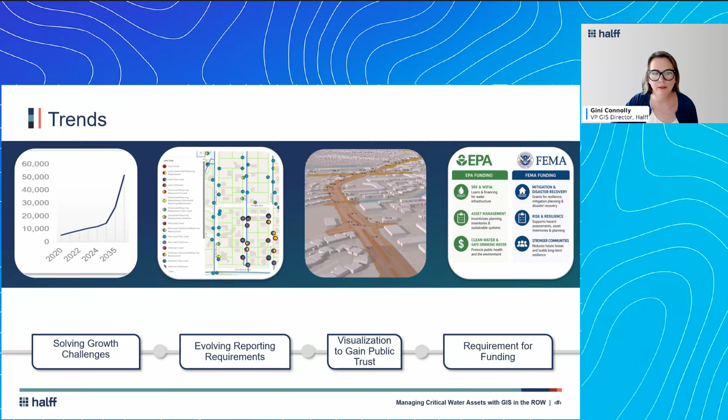And we're also seeing, I really wanted to cap it and underscore, that these asset inventories for these critical assets are a requirement for all the different funding sources that have become available in the changing funding world. So I'm going to walk you through a couple case studies of each of these to just sort of give you a taste of different projects that we're seeing and how GIS and spatial data is supporting these.

This is the town of Northlake, which is a suburb of Fort Worth, Texas, just north of the Texas Motor Speedway. We provide their engineering services as well as their GIS services for this growing town. There's a lot of area to be developed, and it is being developed right here. We call it the Golden Triangle in the Dallas-Fort Worth area.

On the left is a map from their master plan. And we're shifting the thought from these static master plans to more of the dynamic master planning. So really getting that data on a more routine, frequent basis to make these master plans more livable, rather than just a three-ring binder that sits on a shelf.

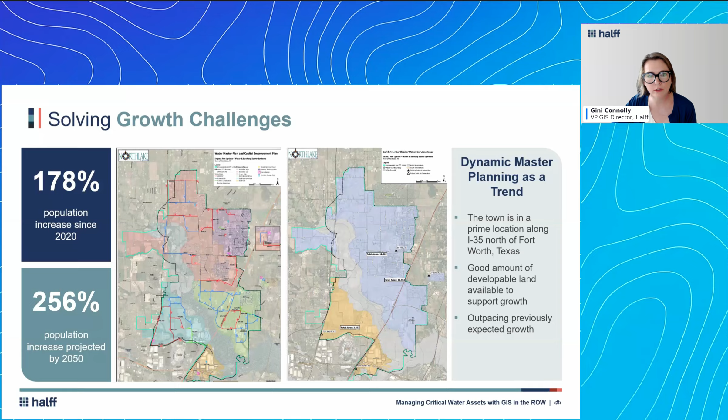So on the right, you can see the two different water sources, the wholesale suppliers that provide water to the town. The growth in the town outpaced what the comprehensive plan suggested, what the master plan suggested. So we track the development for the town, what stage the development's in, but we needed to also add, as an example, we really needed to see how many connections specifically were going to be impacting that particular pressure zone to make sure there was the capacity in that area.

So now with the development, we're tracking the connections, which has become important to understand. It's a little bit of a gap from what the work order and the permitting is showing, that we're really trying to manage those resources better.

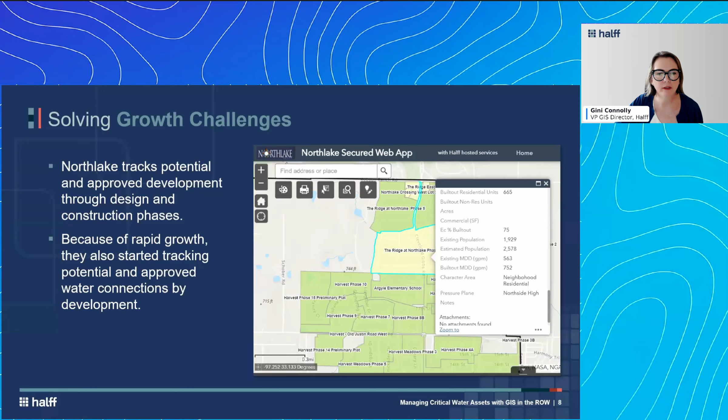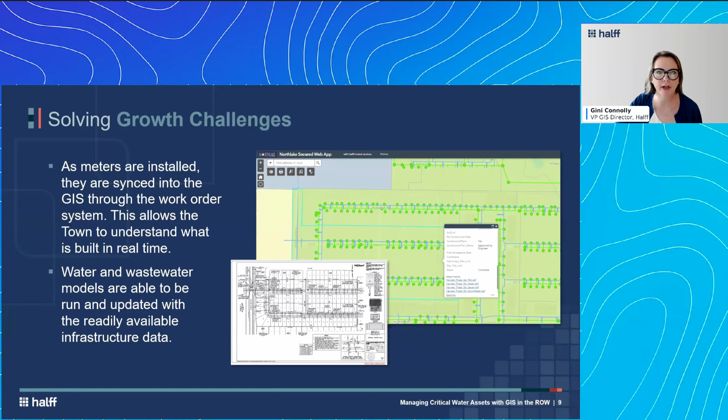As soon as the meter is installed, it's integrated with Cartegraph as well as the GIS. So the development department, the city manager's office, everybody can see when those connections come online, as well as the SCADA environment.

In this particular case study, I also wanted to show we forget that GIS really is behind all kinds of collaboration, but we're seeing, and I wanted to share, we're seeing the need for a lot, especially on the water and wastewater side and the stormwater side.

A lot of these limited natural resources, water, wastewater, as well as funding resources, we're seeing these are not localized issues that need to be solved. They're regional issues. The town of Northlake worked with the city of Fort Worth through their master planning process to create a second redundant water line, the water supply. When you have just one water supply, it's a bit of a threat, and it doesn't necessarily have the capacity.

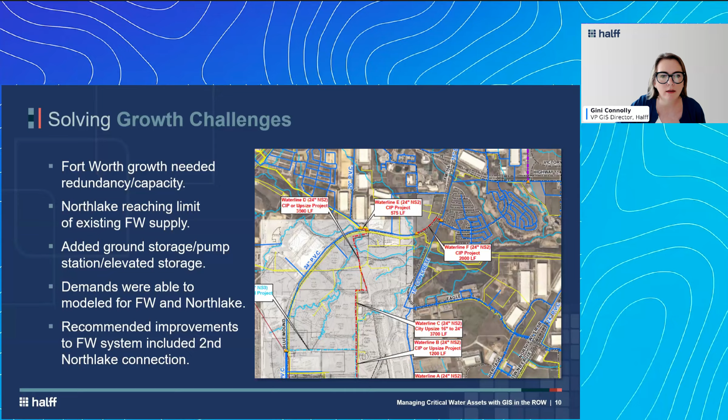So a lot of these challenges are being resolved between cities, counties, and districts with this GIS data. It's able to be modeled quicker, updated quicker, understanding what the adjacent infrastructure is necessary to ensure the supply for that particular area.

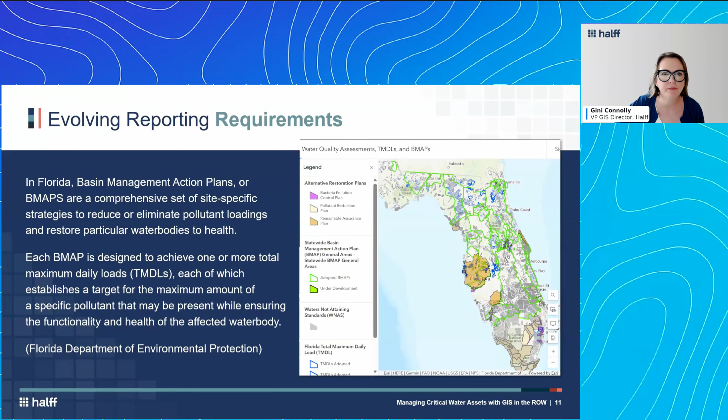On the reporting requirements, we've talked a lot through the years about lead service line and MS4 reporting, and I'll show a bit about that. This is the state of Florida. They are really progressive on water quality reporting, and they control the water quality by different types of basins. There are basin management action plans for those basins within Florida, called BMAPs. Each BMAP is unique to the particular areas and challenges in that basin. We're working with the city of Tavares in Lake County, in the middle of the state, developing the BMAP for the Ocklawaha Basin.

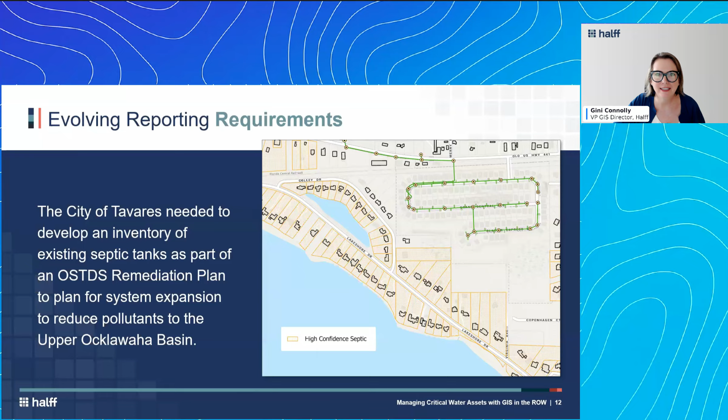They needed a plan to mitigate their existing septic tanks and bring those into the wastewater system, so they needed to know exactly where their septic tanks were. They did not have an inventory of these septic tanks or the people on them. However, they had a very robust GIS tracking all of the sanitary sewer and water services. We were able to correlate that with all of the billing data and building footprints through a big GIS desktop analysis to develop their septic tank inventory for the city.

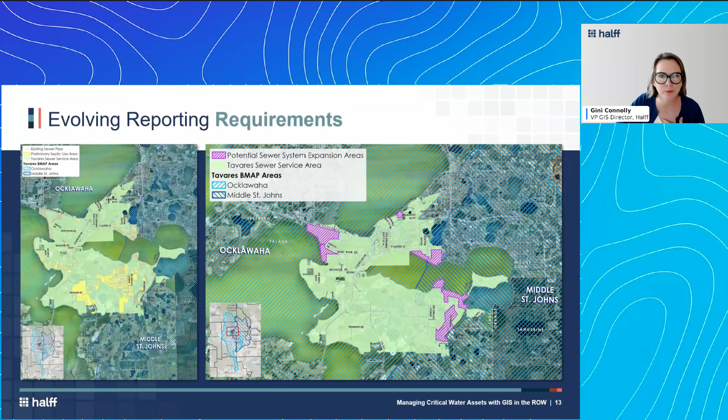On the left, in yellow, you see what needed to be brought onto the system in future years as part of their septic tank remediation plan. On the right, this shows the areas that can be phased, with cost estimates to bring those subdivisions onto the wastewater system to really improve water quality for the city. I thought that was interesting, especially if you're not living in Florida and familiar with how they report. GIS is at the center of all of it.

I wanted to throw this in because we probably have a good deal of audience that are GIS users. We are mapping the storm drain inventory, helping the city of Arlington, and we developed attribute rules to increase accuracy and make data editing more efficient. On the left is a snippet of some of these attribute rules, and this improves all of their stormwater reporting. If you're not using attribute rules to manage these utilities yet, you're missing out—definitely look into that, because it really helps editing and the quality of the data.

One thing we take for granted is visualizing data, but we have this spatial data available now to tell the story. We're in a political climate, especially since 2020, a more volatile political climate, where we need to engage the public and develop public trust as utility owners, or supporting the utility, and get stakeholders engaged as well. We need to show them what that data looks like and tell the stories. We're seeing this as a really important function of GIS that needs to be promoted and identified.

On the left, you'll see a story map funded by ARPA. This is one of my favorite story maps we've provided—it's not interactive here, but we had drone footage showing where these particular investments were planned to be. The story map can be linked off of the city's website. We're seeing this used for comprehensive plans, master plans, and all of those BMAPs. We didn't do story maps for those BMAPs, but in Florida there's a really cool story map for all of those BMAPs if you want to look. On the right is a project we're working on with the city of Fort Worth, a corridor development concept, and we're able to visualize this fairly easily now.

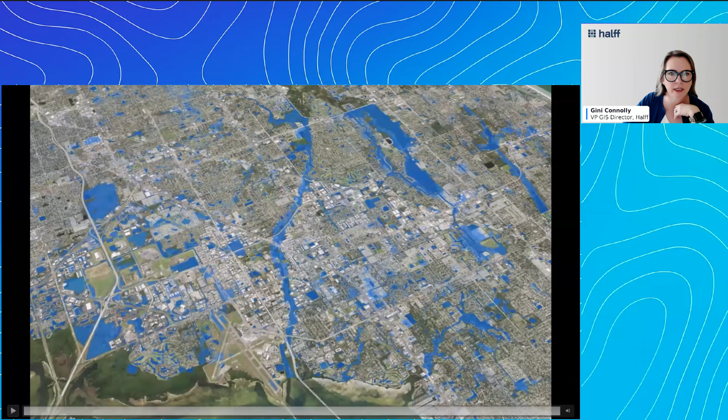And so we're seeing these 3D representations and visualizations increasingly important to tell the story of what flooding could look like in that area. And then it helps you identify what your vulnerabilities are, your critical assets, what needs to be mitigated, and create those vulnerability plans from there too, vulnerability assessments.

Lastly, I definitely wanted to talk about funding. As the funding mechanisms have changed, we've seen over the last couple of years for almost all the agencies between federal and state, it's a very dynamic environment for funding. A lot of this money is coming through federal and state agencies to help support the utilities, especially on the drinking and clean water fronts.

And it's through requiring or getting priority funding. It's a requirement of some of these funding mechanisms to have your asset inventories and your critical assets mapped and understood, and be performing asset management activities to get some of these state revolving funds, all the drinking water funds. So that's the big money that many water utilities really depend on, as well as getting the FEMA money for the risk assessment.

You need to have a hazard mitigation plan, understand where your critical assets are. We're seeing if agencies, like local government or utilities, don't have them already, there's a lot of programs to provide those asset inventories and asset management plans so that the agency can better manage their assets.

So I wanted to leave that plug if you guys are thinking about getting funding or needing funding - the importance of your asset inventory, your critical asset inventory, whether you want to enhance it or start it. And we have a great funding team, we can help find that funding depending on where you are.

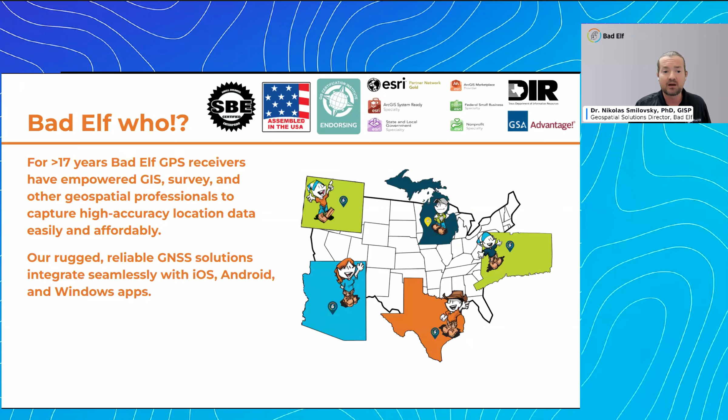That's why we're here. So if you're like, who in the heck is this Bad Elf company? No, we don't sell skateboards. We've been around for about 17 years now, and we are what I call a low-cost alternative GNSS, or Global Navigation Satellite Systems, provider. So we create GPS that you can hook up to your phone, and then fire up an app, say like Esri Field Maps, and go collect data in the field. We're kind of specialized in the fact that we work with iOS, Android, and Windows apps, and we've got offices across the United States. I'm actually in the San Antonio office, but you can see our distribution there. We are a small business, and our equipment's assembled in the USA.

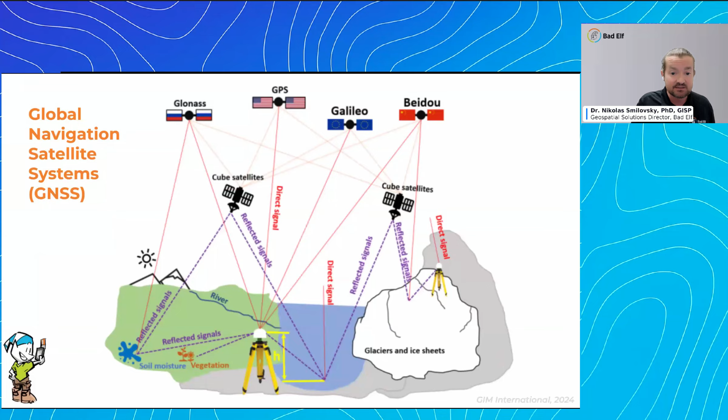So what is a global navigation satellite system then? If you didn't know, it's just a fancy term to say all them satellites in the sky. It's every bird in the sky. It's the Russians, it's the United States, it's the Europeans, it's the Chinese, and they're all working together to provide a position to a device on the ground.

RTK, or real-time kinematics, is a process where a base station, a terrestrial continually operating station, or a movable station collects data and broadcasts a correction to a rover device in your hand, like your cell phone.

Back in the day, this used to be an extremely complicated and expensive process. You used to have to look at PDOP calculators and predict and forecast where satellites were. Those days are over.

There are so many satellites in space now, and RTK systems are so prolific that everybody can get RTK. RTK is the way your Uber drives itself, the way Uber drops food off at your apartment in Austin, or the way Waymo or Tesla AI drives the car without you.

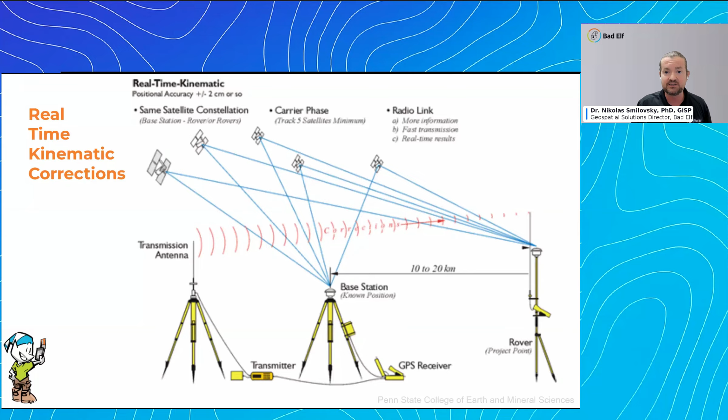RTK is not just used in surveying and mobile GIS, it's utilized in all types of mobile devices, like even an automated lawnmower. A few weeks ago I was at a Top Golf, and the attendant who normally drove around collecting golf balls drove off, and a robot came out and actually drove around collecting the balls, using GNSS and RTK for high accuracy positioning of where that robot is.

At Bad Elf, we create devices that provide position. We provide accurate, affordable, and versatile solutions. We create our devices with the field user in mind, whether you're on the public side working for government, state, local, or federal, or on the consulting side like Halff Engineering or SiteTwin.

Nick, you'll hear from in a little bit. We integrate into real-time GIS workflows. Our idea is to make your life as easy as possible. Again, you don't need a four year degree in geodesy anymore. You just need a Bad Elf device that works really easily.

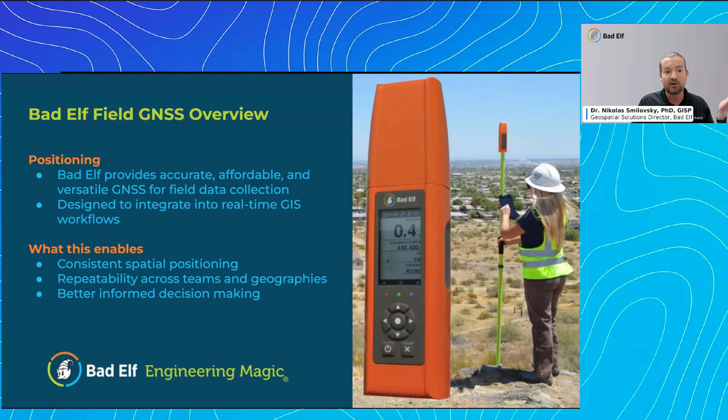What this enables is consistent spatial positioning, so you have confidence that your accuracy and precision will be repeatable across your teams and geographies. A lot of people have large areas in which they need to work. All of this leads to better informed decision-making, probably the reason you're here today.

We have two main products at Bad Elf. We have our survey grade receiver called the Flex. If you're interested, you can contact Bad Elf later about this, but it's a fully survey grade, engineering grade device. You can connect it with peripheral devices like laser rangefinders, radios, utility locators, barcode scanners, you name it.

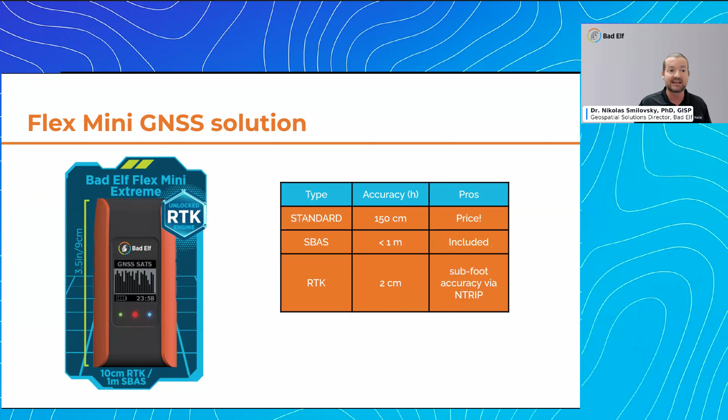More recently, we've come out with the Bad Elf Flex Mini. This is a much smaller device that's near survey grade, about 2 centimeters when connected to RTK. It attaches right to your cell phone, turning a three-handed job into a one-handed job. We've got scanning handles, but the idea is this device provides centimeter level accuracy in the size of your hand. We're no longer talking about multiple setups, multiple tripods, big batteries, and hooking up wires. Nowadays, you can just get RTK and high accuracy for fractions of a dollar.

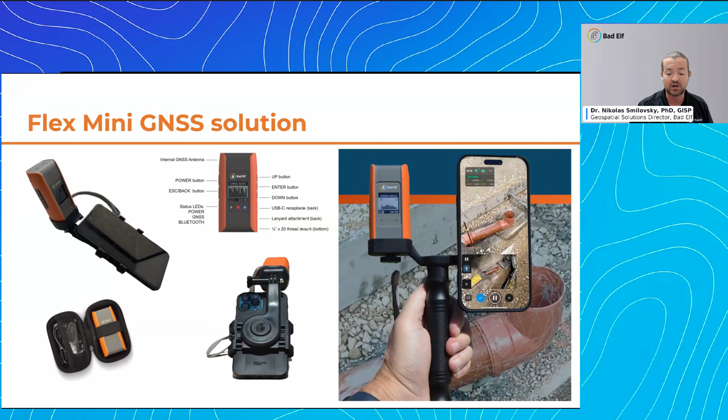Recently in May, Bad Elf released what we call the spring app release, with new features called instant accuracy. This is really what we're going to be talking about today for Bad Elf, and we're going to round out this presentation.

Instant accuracy is an idea we had. We want everybody, all those 500,000 workers in the water utilities industry, to be potential data collectors. You don't need to use GIS, you don't need to do land surveying. But if you have a cell phone when you join the organization, you can get Esri Field Maps or a plethora of other apps installed on your phone.

For next to nothing, you can have a Bad Elf RTK device that connects, and not only does it connect, it does it all automatically. You don't have to do anything. We had a user one time say, no more clicking, they don't want any more clicking. We made it so easy. You'll see here in just a moment that all you have to do is turn the device on. So let's watch this quick video.

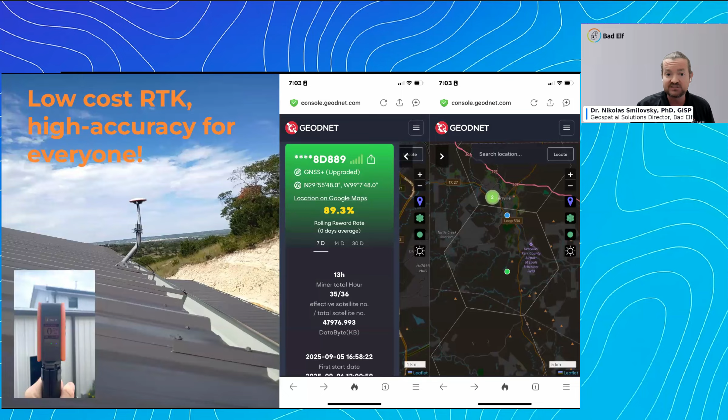Why not? It's addictive. There's never going to be less water infrastructure in the ground. Time to go collect, right? And so this is my house. If you've seen me present before, maybe you've seen this picture, but this is an RTK base station installed on the back of my house for a super low cost.

Again, autonomous vehicles of the future will not drive themselves without RTK. So there's a big dash right now, say with GEODNET, to get as many stations set up around the world as possible. They have about 22 to 23,000 stations for a cost of about $200 a year. And with a device the size of your hand, now you're talking centimeters.

Why is this important? Risk reduction is one reason, right? High accuracy data allows for fewer conflicts, better early decisions, reduced rework, clearer communication between the disciplines. As accuracy goes up, risk goes down. The context prevents the mistakes.

We can work with scanning apps like Pix4D, for example, and you can have the trench open, scan and collect all the underground data of that utility, that water main, fill it all back in, and then have that in the GIS, using it down the road for augmented reality.

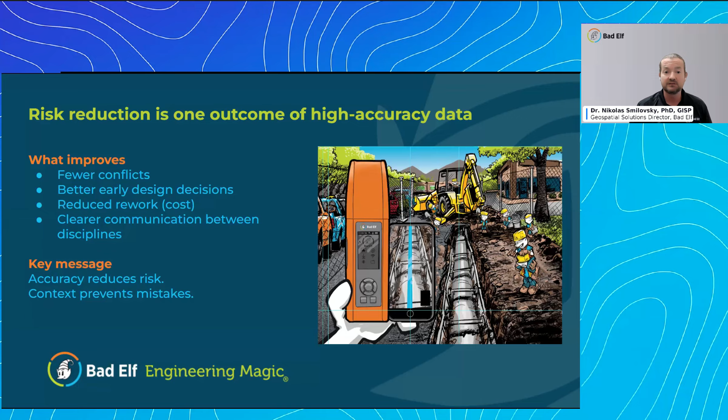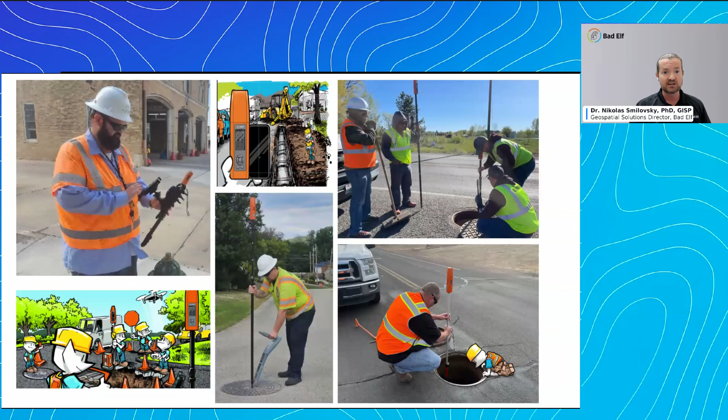This is all based around something we call BYOD, or bring your own device approach. Again, you have a cell phone or tablet that your organization gives out, you hook up your Bad Elf device, and you go start collecting data. It's really that easy, okay? And then nowadays, all that data goes into really sweet dashboards for live analytics, to better inform decision making.

And this is no longer pie in the sky stuff. So for the 50% of attendees today that are not currently using GNSS, this is no longer your dad's GPS that you had to, as they say, cut your left pinky finger off for. This is a device that's about the same cost as your iPhone in your pocket.

So what are the key takeaways? There's a lot of work to be done in the water utilities industry. Duh, right? That's a hard takeaway. There's over 500,000 people directly working in the industry. So this is not a small segment of people, right? There's a lot of people there.

With instant accuracy in Bad Elf, everyone can go collect high accuracy data. The bridge has been gapped, or the gap has been bridged. We no longer have an excuse to not have the data in the database. That means there's a lot of data, and that means there's a lot of data collectors. High accuracy field data is no longer expensive, and RTK networks are plentiful. We live in the golden era of GIS, or what I like to call the geospatial moment.

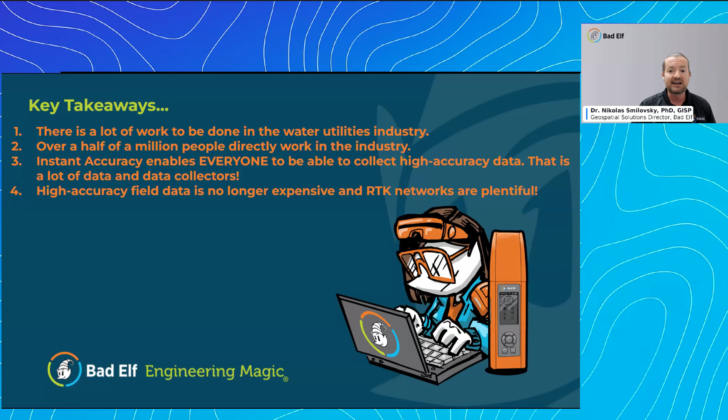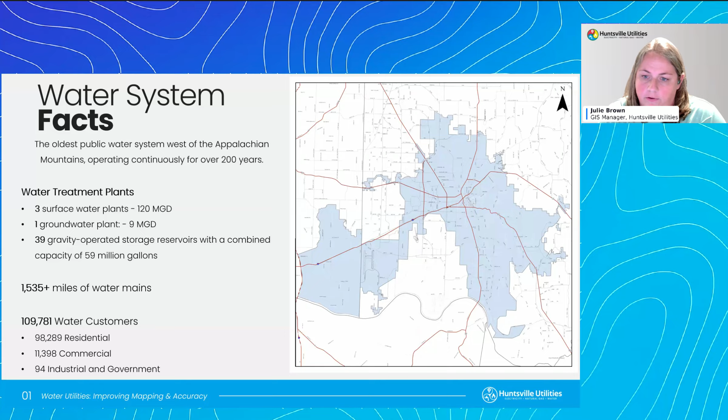So a little background about our GIS and our mapping system here at Huntsville Utilities. My former boss just retired in October with 40 years of service. He started this mapping department in 1985. Originally, that mapping was done on all paper. In the early 90s, they started digitizing everything. I've heard stories about it and all that good stuff, that they digitized and put it into MicroStation. We actually just stopped using MicroStation for some of our work in August of this past year.

After that, we went to an Oracle Spatial database using Hexagon's G technology. That is where we just came from. In August, we implemented NISC's solution. I'm not sure if anybody's familiar with that, but NISC is intended to help utilities and co-ops do their billing, their mapping, their inventory, and all of those things. We've been very happy with our switch. One of the things that NISC pushed us to do, and this may be surprising to all the GIS folks on this call, up until August, we at Huntsville Utilities were not an Esri shop, and now we are officially an Esri shop, and I can officially say I'm excited about it. Esri has the tools that are made to map, and that is one of the things we have really been missing prior to this conversion. We're able to push out maps a lot faster now than we were prior.

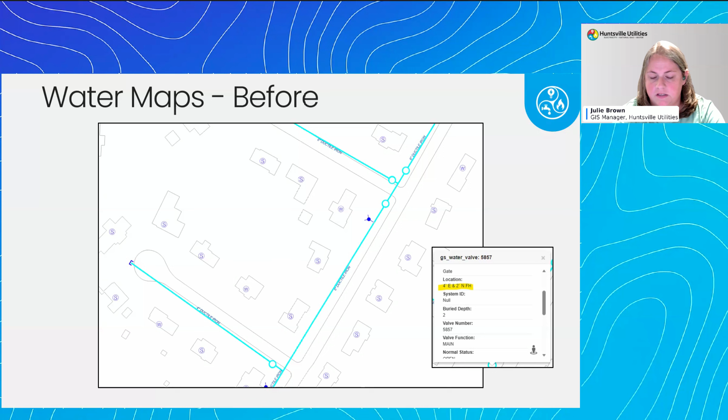You'll notice on this map we also have all of our water meters, represented by a W or an S for sprinkler and water meter - that's where we have a water service. Originally, going back in time, we put all of those services in the middle of the house. We didn't know exactly where those services were, so we placed them in a generic area just to show it feeds this house somewhere. After the GPSing, we're actually going in and grabbing those precise locations.

It's a little closer - I've hit a wall recently. Our operations folks are like, I don't really know that I care where the meter box is. And I said, well, the deal is when we do an AMI - we're in the process of deploying an AMI system for our water - those lids are going to get covered up. So we're going to go ahead and GPS those, and you'll at least be able to have them. You'll notice here that we have an attribution for GPS - that was one of the ways that helped us determine if it was a good location or not.

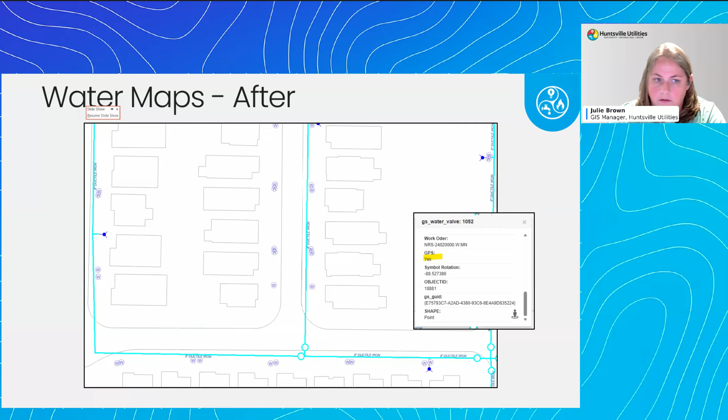So for next steps in our process: we're going to start using the GPS for valve inspections. We do those on a 5-year basis with our operations folks. I've asked them, while they're there doing that valve inspection, to take that 30 seconds or even less and grab us a GPS coordinate.

We also want to start updating our maps where those locations are not exactly in the right spot. We're wanting to clean those maps up. Nick mentioned all those fancy dashboards - that's something I'm wanting to get going. We have a lot of reporting that you have to do on the local government side, and I want to let our upper management know what the data actually looks like.

One of the things we're really happy about with the Bad Elf is that it's simple - Nick talked a lot about this. Also, going back to the different ones we looked at, the Bad Elf was the only one that had a small screen that can actually give you real-time feedback of your connection. It shows the accuracy right there, so instead of having to look at the iPad, you can look at the Bad Elf for the accuracy. What they've told me is they just look straight up at it and see what accuracy they're at.

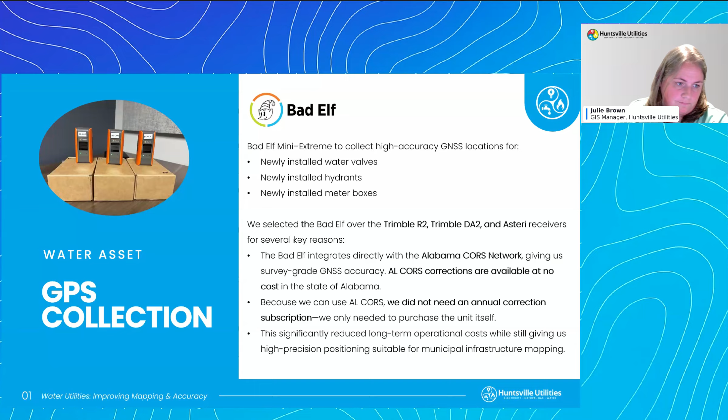We're based in Austin, Houston, and Dallas, and have been around for over two years now. My role here is to help bridge the gap between the field work and the technology we've been discussing today. A lot of our presentation focuses on underground work, given GIS pertains to all data collection, above and underground. But in the theme of the event today, we're focusing on challenges and solutions for how to better map and document water infrastructure in the cities - which, from our side, is the most requested utility and the hardest to find. So the title is Managing Water Infrastructure in the Right of Way, and a lot of it's about how field teams can bridge the gaps through utility visibility, coordination, and construction readiness.

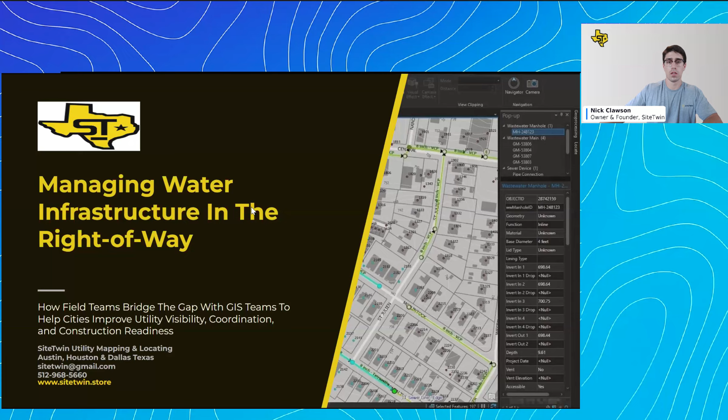Why is it so hard to manage water? From the field and general trends, we see a lot of things. Obviously there's population growth and infill projects as communities develop. Road expansion frustrates everyone who drives - as a prominent user of I-35, I can speak to that honestly. Aging mains and legacy repairs - some of our infrastructure dates more than 50 years back, which is obviously a problem, especially from a documentation perspective. Emergency repairs compete with planned work - when outages happen, when strikes happen, when there's leaks, someone needs to get there now. And there's CapEx improvement projects that are always years out.

But today is really what we're dealing with.

A lot of our push, a lot of our work has been around fiber and telecom conflicts in the right of way. I'm sure you've seen and heard stories, and there's just a lot of infrastructure, and it's really a product of a lot of spending going on from the federal and local governments around the country. A lot of congested corridors, there's really no removing these things. It's just more people, more utilities, and you have a limited time frame to service everybody.

Most importantly, what we find is the staffing shortages across public works, and then in the data collection realm and the underground utility mapping realm. There's a massive demand for it, and a lot of the technology, as you've seen today, is available. It's just getting the right people to use it. Given how easy it's become, it's still a human-based problem. It's a lot of staffing shortages that we've seen.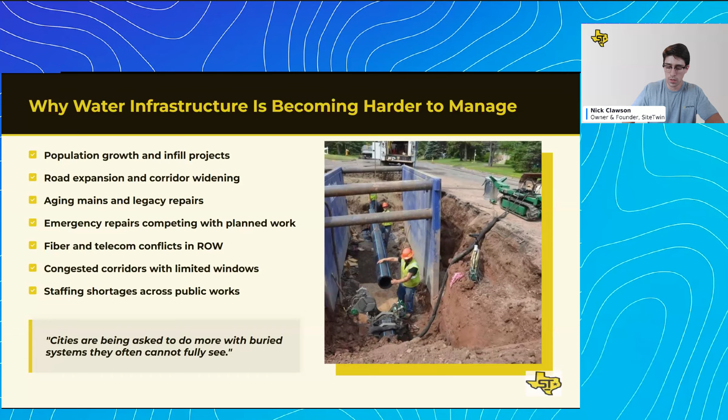So some of the challenges we see, this is the most common: water utilities are installed without tracer wire. If you're not familiar with tracer wire, it's just a metal wire end to end that electromagnetic locators can put a charge through, so to speak, and locate them. That's traditional locating. A lot are either broken or just not there.

Another tool that we employ and push for everyone to use as part of the investigative process is ground penetrating radar. As people who have used it or been a service recipient of it know, soil conditions are extremely limited, which limits your visibility, especially without tracer wire, which is a step before that GPR scan.

No existing records, that is a common theme. Whether it's a small municipality or a larger one, it's not just not having them, but not having the right point of contact or the right communication channel in order to get those, and then get those in a usable format, something that your field team can adopt easily. You can send to the phone, and we can get to work.

And that brings to the next point about breakdown in communication, which again, as cliche as it might be, is the biggest challenge that we see from the field to the office. And then data silos. Maybe it is available, but it's not available to everyone. It might be locked in the backroom closet, as we've all heard before.

A lot of those problems lead to things like unknown line locations and unknown offsets, depth uncertainty across corridors, abandoned lines and inactive assets that often don't get updated. There's active generations of construction that goes on, and offset valves and fittings from prior work, if not documented correctly, are kind of lost in the ether, or lack thereof.

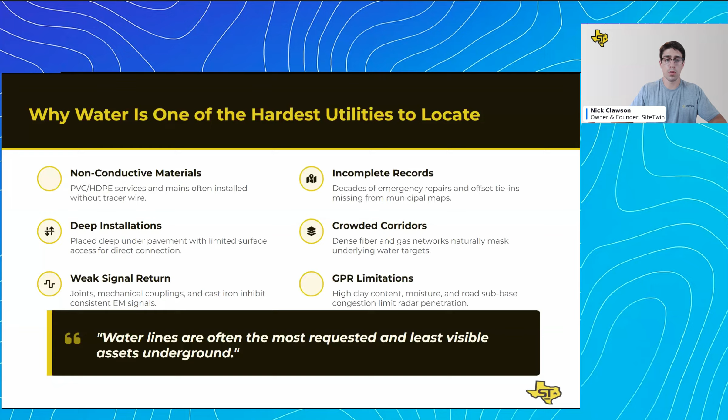Something that we see, and I'm sure some people here are familiar with, is that the demand for locating these underground facilities is far outpacing the capacity. So the 811 ticket, or call before you dig, whatever it is in your state, is really being pushed right now. There's a lot of infrastructure going on, a lot of growth, especially with the data center push and just natural population growth, that really leads to some staffing and then demand and supply capacity issues from our side.

There's long backlogs, right? Municipalities have projects that are years in advance or years behind. Limited crews, both in-house and limited availability or resource to get a third party, is really not helping keep up with the demand.

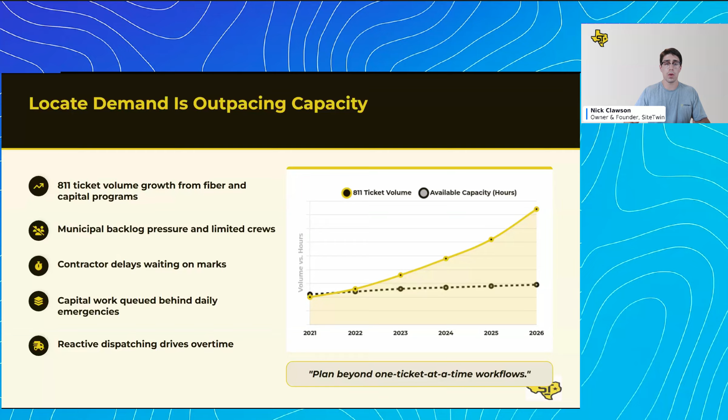Our goal is to plan beyond one-ticket-at-a-time workflows through accurate data collection, and leveraging a lot of the tools that were mentioned, whether it's a GPS such as Bad Elf, GIS platforms with real-time feedback loops you can view from the office to the field, and EM locators that can connect to these GIS tools via Bluetooth, so you can capture data as you go. If you have someone that can open a phone, you have people that can collect data.

So what happens when visibility is poor? Water main strikes—you've probably seen a video about water spewing 10, 20 feet in the air. It is not Schlitterbahn. It's often the product of somebody digging without accurate information, maybe even with a mismark. No knock on the available records or the 811 providers—their job is to go mark where the utilities are as shown on the map. That's often different than where they actually are underground, and it leads to a lot of strikes.

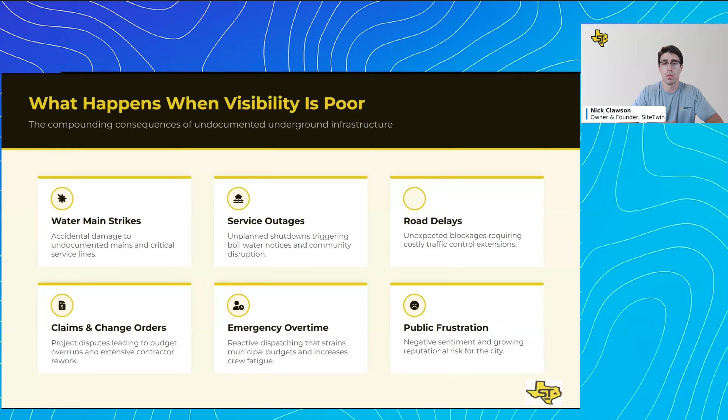Of course, there's outages, road delays—the most frustrating for all of us day to day—and then claims and change orders. A lot of project disputes leading to budget overruns and a lot of rework. If it isn't documented, it's rather redundant—emphasis on rework. Emergency overtime and personnel, and then of course public frustration, which pops up just about everywhere.

So what's the shift from reactive to proactive management? We've talked about a lot of problems, but every opportunity you go in the field is an opportunity to capture valuable data. One way we do that is by positive field locates and verified marks. If you're able to verify where an underground utility is running, you're able to collect the data. That's a great opportunity to take your GPS out and make sure you get it back to the GIS team or whoever needs these records, preferably on a real-time feedback loop.

But it's easy enough to go to your phone and export a file for any of us, especially open potholes and exposed utilities for engineers and surveyors. You got a pothole to get to your quality level A if you're going to be able to collect that data. Exposing utilities, opening up potholes is a premier time to be able to collect that data, and sometimes it's just missed. Capital improvement replacements is definitely something you can help plan with previous accurate records.

Also, another opportunity to go collect more information: new subdivisions that we drive by all the time and service taps. Instead of just running the lines there, let's go ahead and collect the information, and be able to distribute it back to the city, whether that's on the private or public property side. And then valve and hydrant maintenance visits.

I think Julie touched on this very well. Every time you go out, it's an opportunity to collect the valves. If there's some type of leak or damage, being able to stake out or walk back with high-accuracy GNSS receivers to valves and hydrants makes a massive difference, both on the public side and then for internal operations. Phrase that we go by is the best time to map infrastructure is when it is visible.

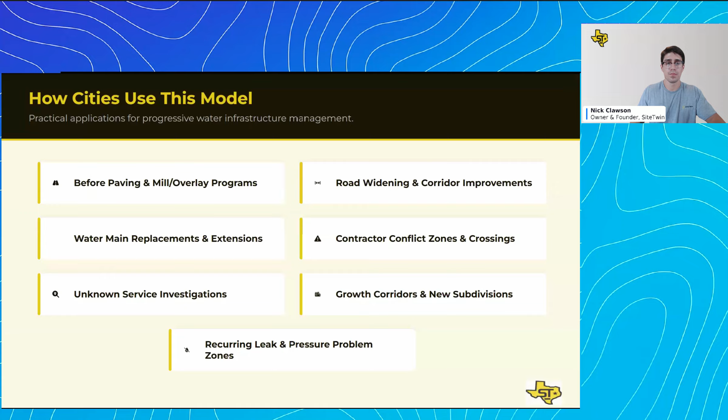The shift includes, instead of repeating blind responses, they begin capturing every repair excavation in the GIS, verifying alignments, valves, depths, materials, photos, notes, as much information as you can collect. It's available to do so in the palm of your hand. 12 months is a rough timeline.

Again, a lot of what I've talked about is a quote unquote real-time feedback loop. But when you're talking about things like cities and collecting whole water infrastructures, it can still be a lengthy process. So the ultimate goal is to have faster dispatching with reliable valve shutoffs, better contractor coordination, staging, improved replacement priority planning, and reduced uncertainty for crews.

So why municipal teams are pushing to work with a lot of parties like that, or just pulling in third parties for support on this side: fast responses, right? I mean, you've probably made a call for a variety of services where you won't hear back for weeks. I think it's hugely important that the private side steps up and has an incentive to be able to say, hey, I'm going to pick up and be the first one available with this solution, which sounds really simple, but often is not.